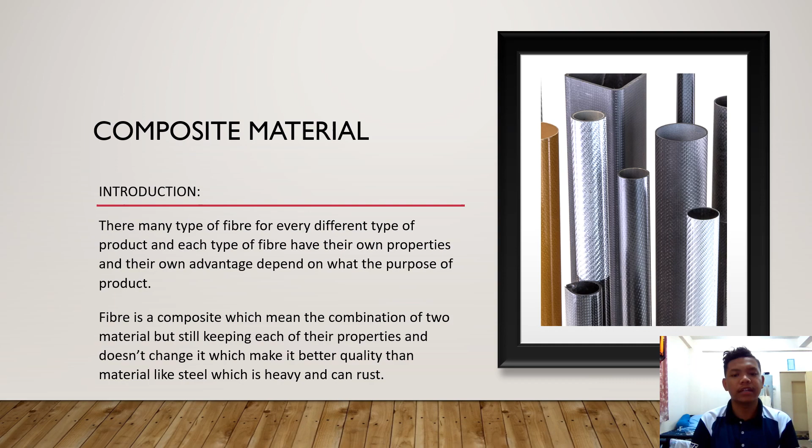On the other side, composite is a thermoset, which means it can't be recycled, but there are two main ways fiberglass can be recycled at present. One is to treat the material with high pressure and heat it to a high temperature, thereby destroying the chemical structure of the fiberglass resin and recovering some of the original constituents. The problem with this process is that it's expensive and requires a specialist chemical treatment plant.

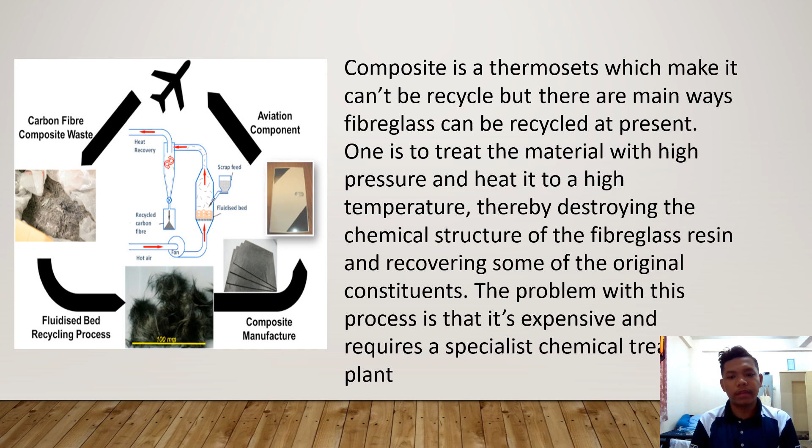In a cycling race, time is everything. As a pro cyclist, Azizulhasni Awang needs a bicycle that is lightweight and can overtake other racers in a tournament. This explains why cyclists now opt for an all carbon fiber bike instead of one made of aluminium alloy. For example, our Malaysian pro cyclist Azizulhasni Awang's bicycle is made out of an aircraft part, which is a composite carbon fiber alloy. A bike made of carbon fiber is so light and tough.

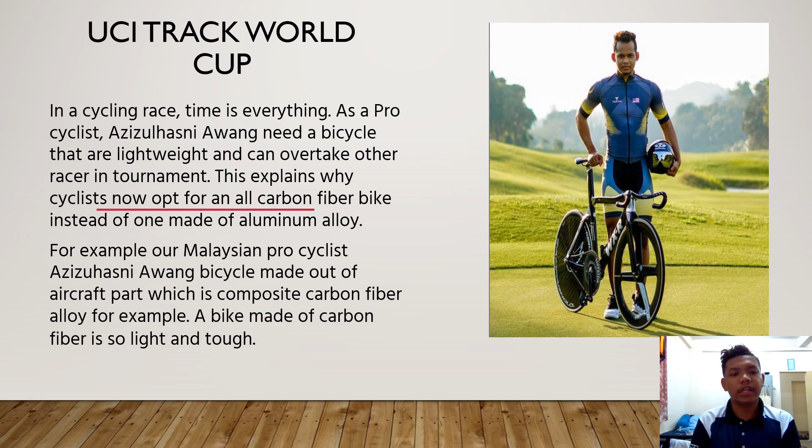So thank you for the introduction just now by our group member, Zaggy Zaid. I'm going to continue with the direct material used in this sport world. This one is for all the sport world that uses it. The majority of this direct material is carbon fiber, the use of carbon fiber in sport direct material.

Pro cyclists can now go faster for longer distances. Golfers can swing easier with much better precision. Tennis players are able to have more versatile moves and better control of the racket, while board skaters can now do more mind-boggling stunts. This is because carbon fiber has lightweight and high strength or toughness.

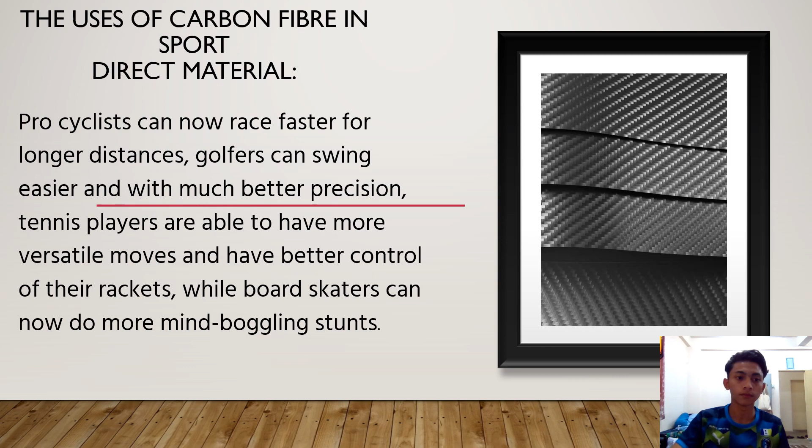So for the second one is the indirect material used for this product. The product that uses the indirect material is the bagging film, because it has high strength and flexible nylon material used to compact all other bagging materials and laminate. This material can be used at room temperature and in oven and autoclave.

The carbon fiber bicycle uses a bagging film process to compress part of the body of the bicycle, so it's not easy for the bicycle to crack and scratch if there is any accident while you are riding it. This is because when you ride a bicycle for sport or just for fun, if you fall it easily cracks. So this bagging film is put in to compact or to make the fiber stronger.

So for the next one is the process, or you can say the progress of the process, of material preparation that you need to have. The first one is the material. The first process to make this carbon fiber bicycle frame is to prepare the type of material needed. For example, in the picture, the two co-workers are preparing the carbon prepreg to be kitted before kitting.

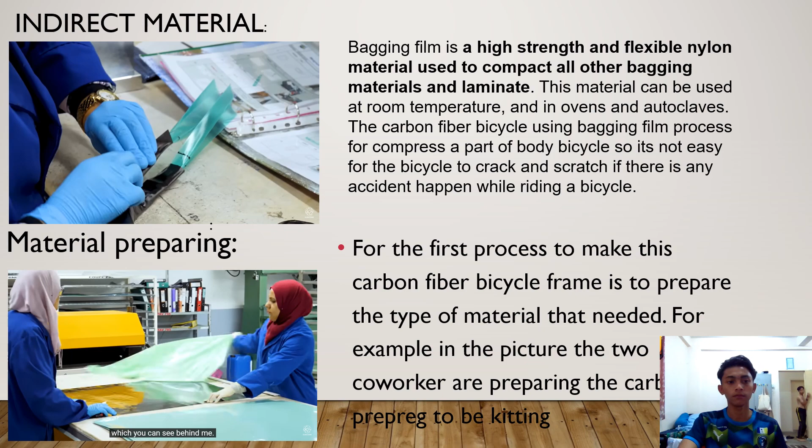The next one, after you are done preparing the material, you need to check the job sheet for what is wanted, and then you can proceed to kitting or cutting the carbon prepreg. After preparing the prepreg, they will start kitting the carbon depending on how the job information is given.

For the next one is to assemble the carbon prepreg. Assembling is where they assemble the carbon, or the other name is laid up. This component has 405 pieces, which need to be laid up on the bike frame as the mold before being put into the press machine.

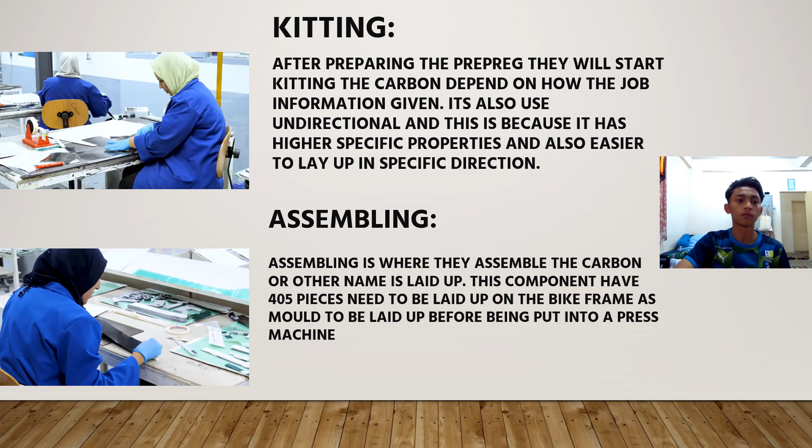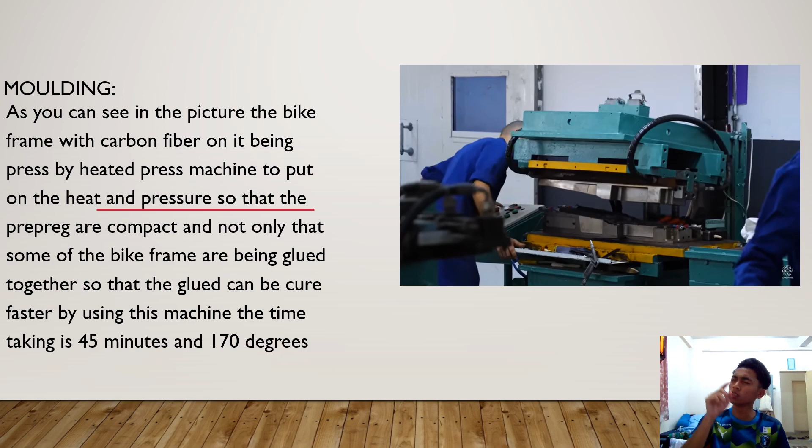Finish the first process, and then you can start molding. As you can see in the picture, the bike frame with the carbon fiber on it is being pressed by a heat press machine to apply heat and pressure so that the prepreg is compact. Also, some of the bike frame parts are glued together so the glue can cure faster using this machine. The time taken for this machine to fully cure the resin is 45 minutes at about 170 degrees.

The next machine also cures the resin, but this is not molding, because when you put the bike frame in, some of the resin is not fully cured and still moist, and the press machine can only press but cannot give a full cure, leaving air gaps remaining in the frame. So this machine makes sure the air gap is fully absorbed by the heat. After the resin is fully cured and there are no air gaps, the frame goes into the surface finishing process. When the resin is cured, the team proceeds with cleaning the surface of the product, making sure it's clean from any excess resin or mold defects.

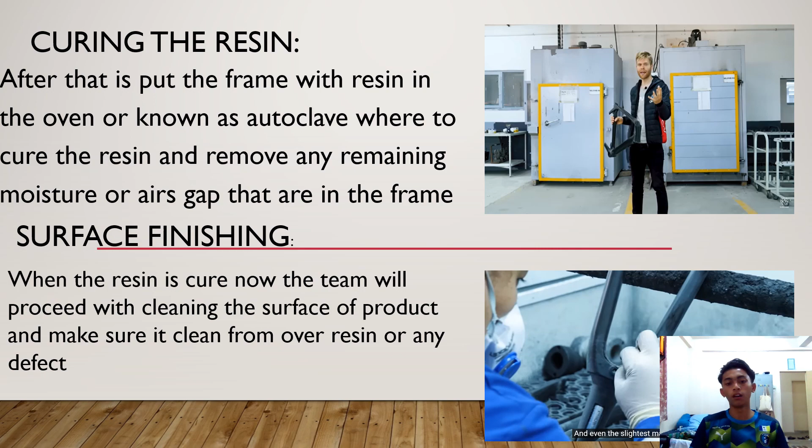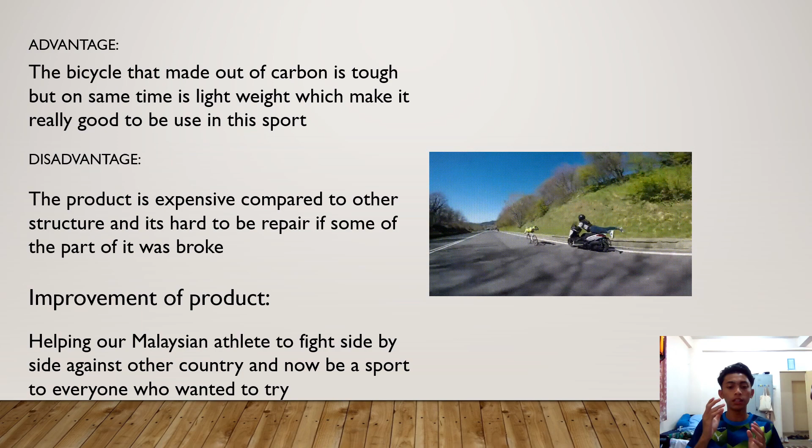The improvement of this product is that our Malaysian athletes can fight side by side against other countries, and now it's become a sport for everyone who wants to try it.

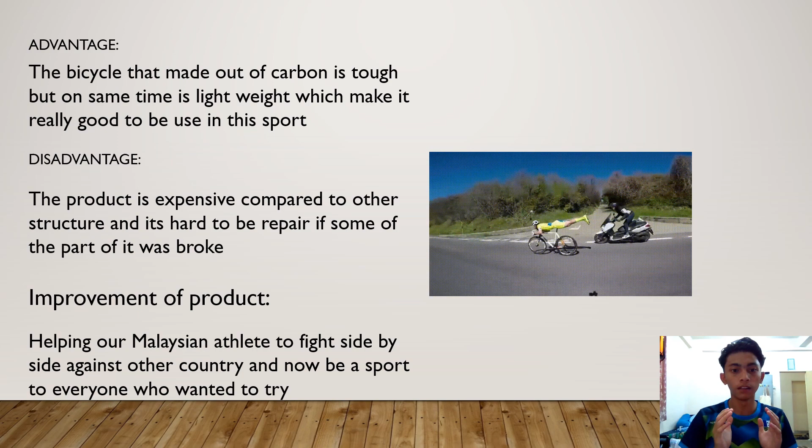But for the actual improvement of this product, I think it can use a lot more comfortable features for the cyclist, so it can be easier to hold things, such as a holder for the water bottle, which some parts don't have because they want to go even faster, but it is actually faster now because it's using carbon fiber.

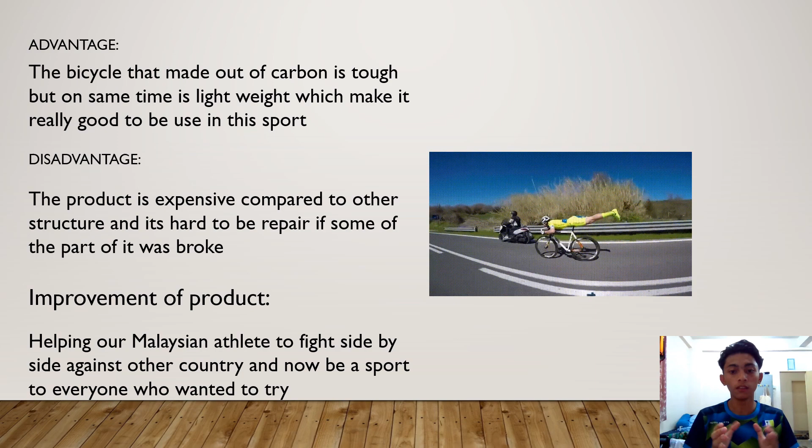I'm going to continue about aircraft composite. Composites are a combination of materials that, when put together, do not compromise each other's quality or integrity. Instead, they enhance one another, providing structural advantages that improve the durability and performance of aircraft.

Composites fall into two categories, such as fibrous and particulate.

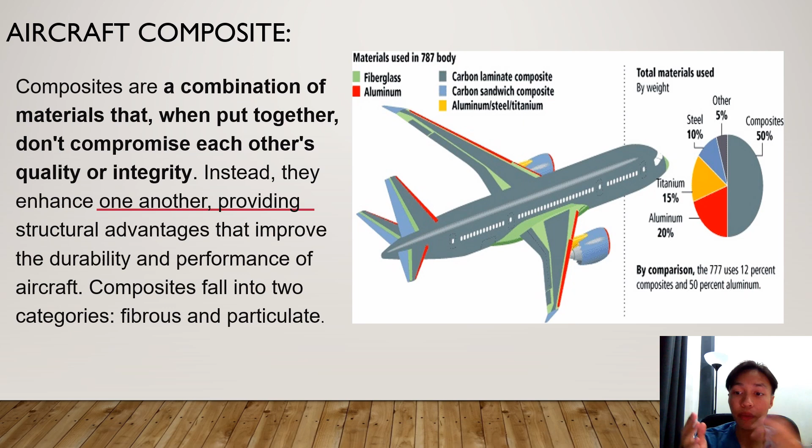For aircraft direct material, overall, carbon fiber is the most widely used composite fiber in aerospace application. Many types of reinforcement material are available for aircraft use. Three types are used most often to build custom aircraft: fiberglass, carbon fiber, and Kevlar.

Glass fiber or fiberglass is the most widely used reinforcing material.

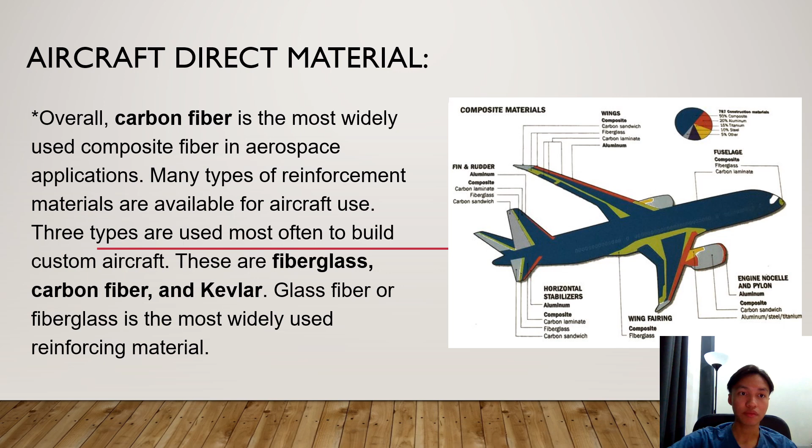For aircraft indirect material, sealant tape is typically used whenever an airtight seal is required and will adhere to most surfaces. It is most commonly used in the composite manufacturing process for both temporary and permanent vacuum bagging.

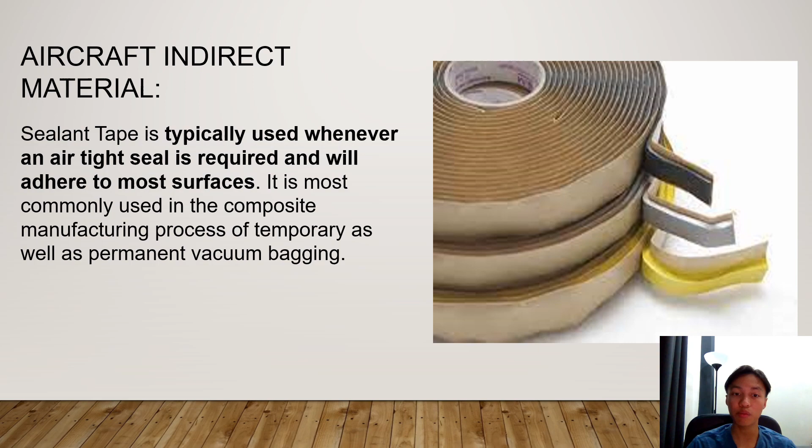The advantage of aircraft composite is that composite material does not corrode as easily as other structure types, and it does not crack from metal fatigue the way aluminum does, which lets it last longer than metal, meaning lower maintenance and repair costs. The greatest advantage of composite material is that it does not break easily.

But this means it is difficult to tell that the interior structure of the material has been damaged, because aluminum bends more easily, making it easier to detect a need for repairs. Composite materials are also more difficult and more expensive to repair.

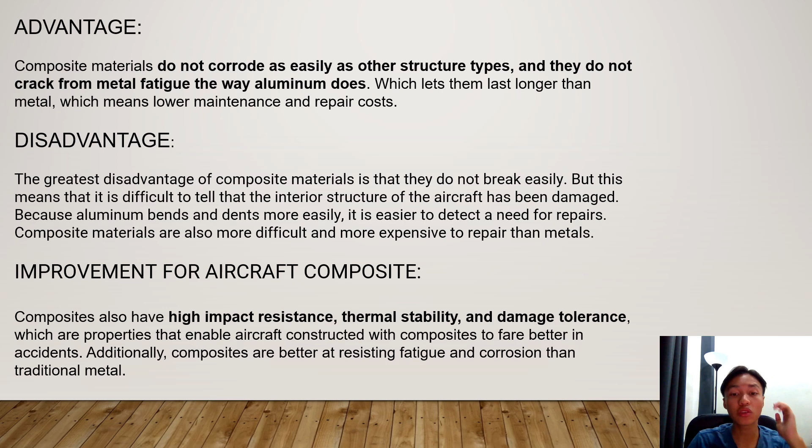For the improvement, aircraft composite also has high impact resistance, thermal stability, and damage tolerance, which are properties that enable aircraft constructed with composite to fare better in accidents. Additionally, composites are better at resisting fatigue and corrosion than traditional metal.

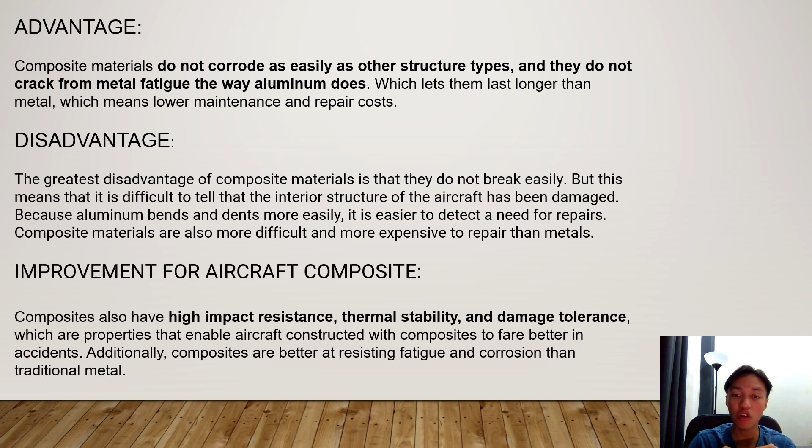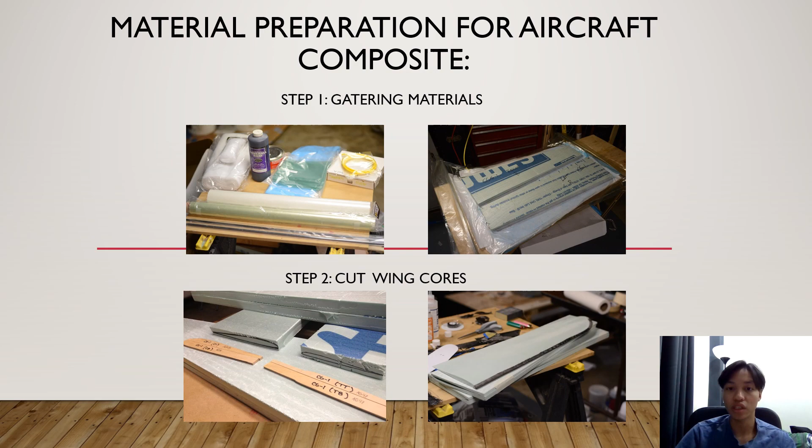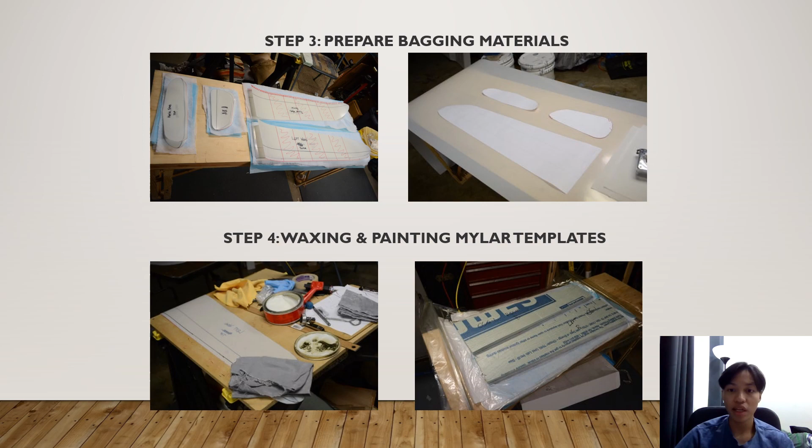The final step is material preparation for aircraft composite. Step 1: gathering materials. Step 2: cut wing cores. Step 3: prepare bagging materials. Step 4: waxing and painting mylar template. Step 5: preparing fabric. Step 6: bagging. Step 7: unbagging. And the final step is trimming the wing.